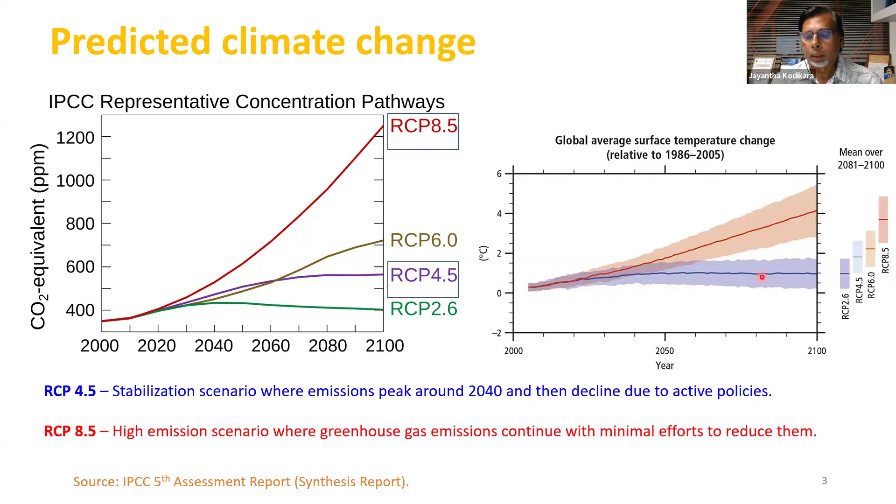So along with that, we will also get some temperature rise. This red line corresponds to the business as usual scenario. If we mitigate, we'll get a plateauing of that temperature. So I put together these two figures.

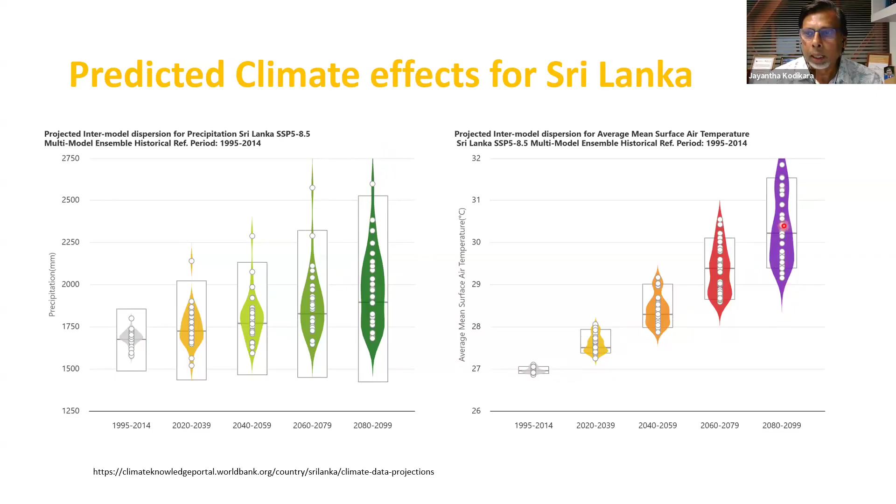If we don't do anything, you will get these extreme cases, but if you do some mitigation, you might be in the middle area. In any event, you are expecting precipitation to increase, but more problematic is this variation, extreme events, like the Ditwah cyclone. Temperature is also showing similar increase with variation and extreme events.

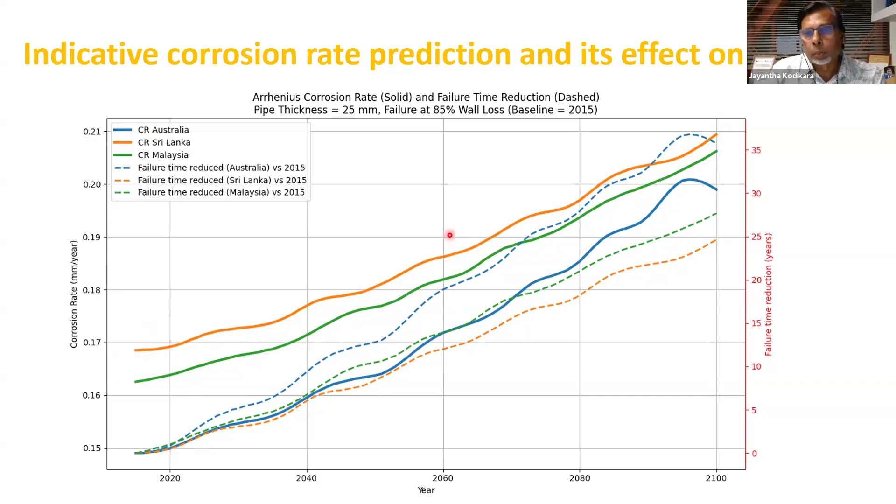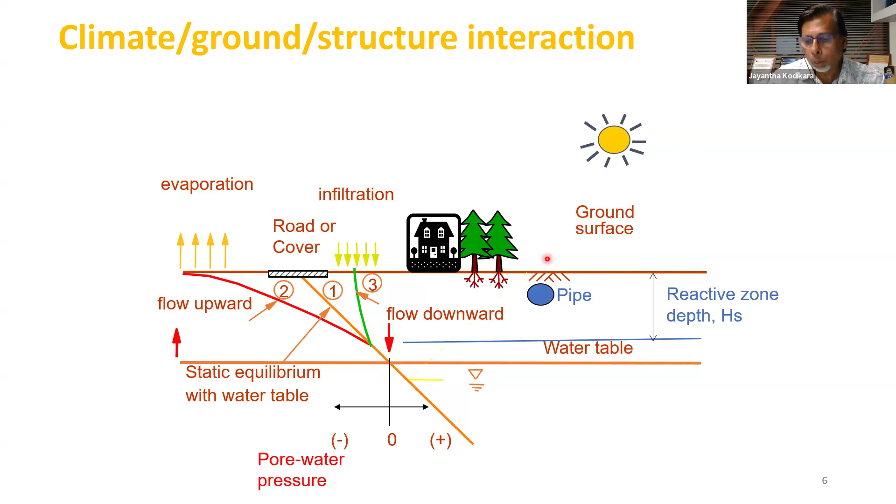So during wet-dry cycles this will fluctuate, and that fluctuation will cause anything buried in this zone above the water table to undergo effects of climate - pipes, roads, houses, foundations, and so on. That's the so-called reactive zone above the water table. Anything placed in that zone will undergo these changes. Of course, if you have a slope, then the slope will have additional problems due to gravity.

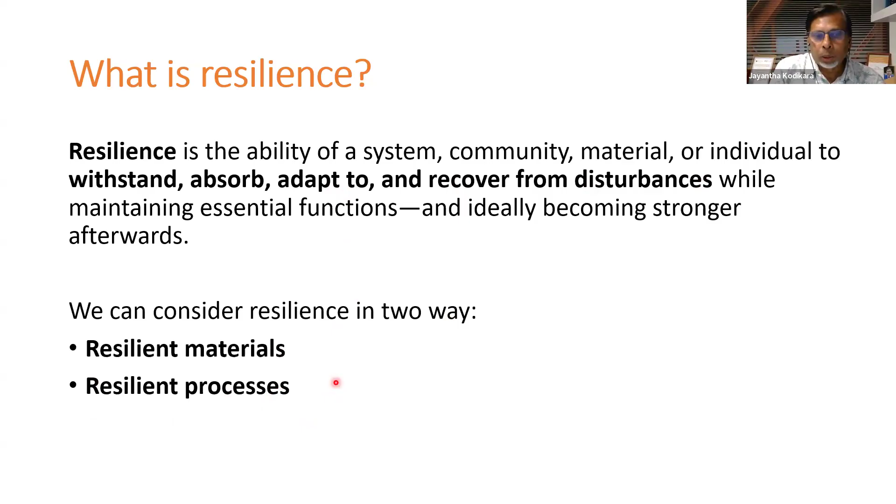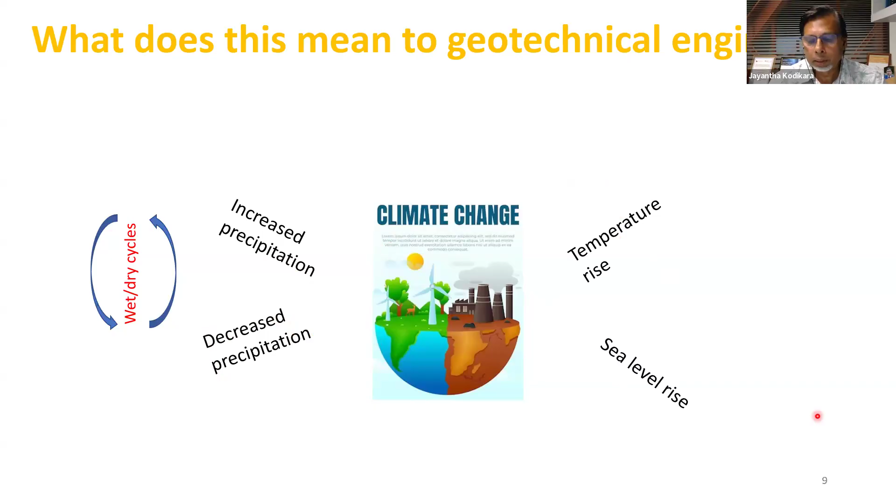So when precipitation is very high, you can get infrastructure moisture damage. You can expect landslides, which we already know, water erosion. I will talk about that. Sometimes not very much talked about, and flood damage as well.

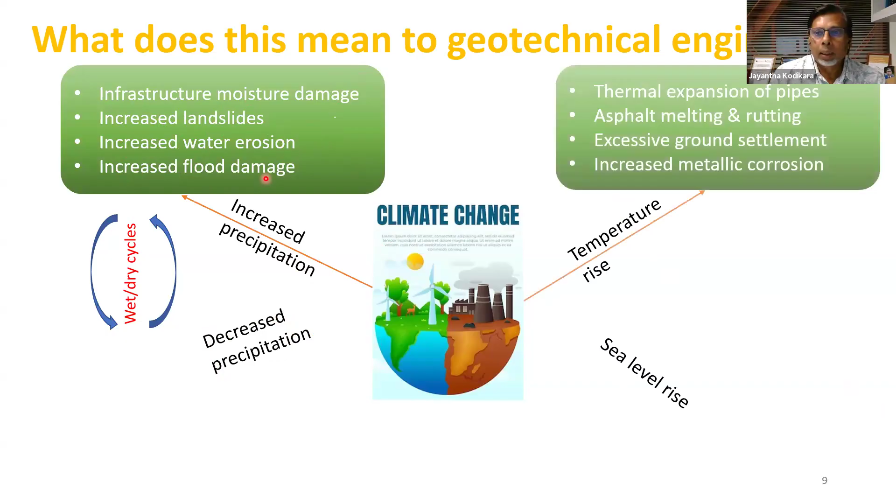So then, if you have temperature rise, you can get thermal expansion of pipes, so joints can buckle. Then, if you have asphalt on roads, then they can melt and rut. Excessive ground settlement can happen. Increased metallic corrosion. I talked about corrosion already. That's a silent problem which is not very well understood or explored.

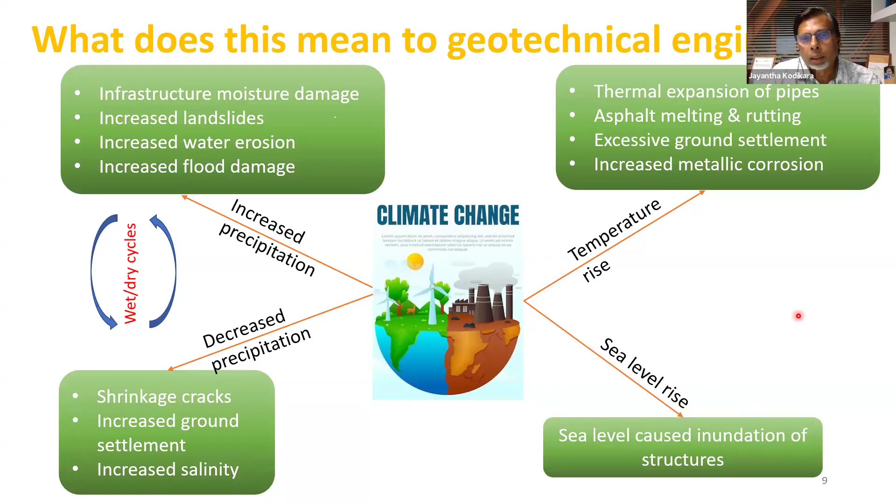Then, if you have drying, then you can get soil to crack or concrete to crack, and then increased settlement can happen. And of course, with drying of moisture, you can increase the salinity of soil as well. And with sea level rises, you can get inundation and associated problems. Salinity also may be an issue. So these are some of the climate change effects we can expect in geotechnical structures and so on.

So I'll talk about some examples on roads because we have been researching on this topic for the last 5, 6 years in my hub. And before that, of course, I was working on pipelines, but I won't talk about pipelines today. So it will be roads and mostly landslides.

So when we talk about roads, roads were there a long time ago, Roman Empire, and they had very good roads, and they maintained the empire, moving military, and also other goods and services through their network.

Then, more recently, in 1960s onwards, America developed their highway system, which was actually developed in President Eisenhower's time. It was a huge project, and they made it very redundant. That means it's bigger than they needed at the time. So that provided them with a lot of economic activity continuously without any bottlenecks. So that was how they developed, that helped them achieve economic prosperity.

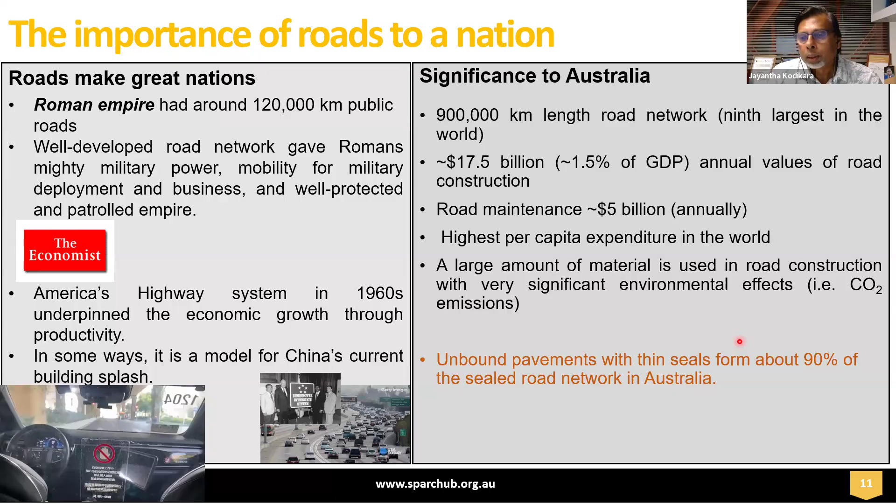Seal is bitumen or asphalt, and they are using 25, even sometimes less, spray seal, sometimes 20 millimeters, up to 50 millimeters in arterial roads. Of course, freeways and other things are high quality, thick asphalt or concrete pavements. But for low volume roads, they have been using this concept, and that's been challenged with these climate change effects.

So, what are these flexible pavements with relatively thin seals? So, they have a granular base as a load bearing base, and of course, they have the seal, which can be a bitumen or asphalt seal. I told you thickness may be not as high.

I think in Sri Lanka, in main roads, they use so-called carpet, which is about 50 millimeter asphalt binder course. And I think in very low volume roads, they may be using thinner asphalt as well, like in Australia. So, subgrade is the natural ground which has been prepared for the road, and is the weakest link normally. So, granular material is stronger or stiffer, and then the bitumen.

So, under traffic loading, they can undergo so-called plastic deformation, which leads to a so-called rut on the wheel path, as you can see here. If you put a ruler or gauge here, a straight edge, you can see how much it has rutted. Normally, we need to minimize this rut to about 20 millimeters or less, because you can get water, aquaplaning, and it is hazardous.

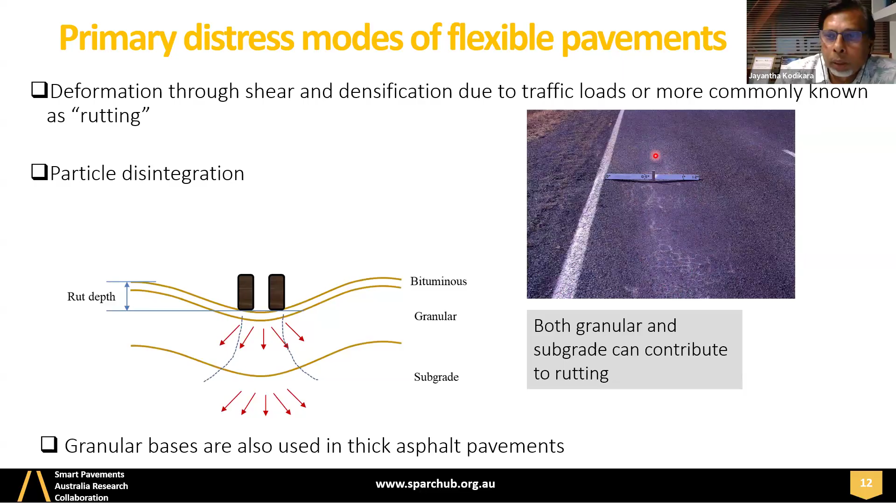So, this rutting is the primary distress mechanism for these unbound pavements. And of course, stiffness is also very important in this load-bearing unbound layer, because under wheel load, if the stiffness is low, load will directly come into the weak layer, subgrade, and you can get more rutting, because rutting can happen in subgrade as well as the unbound layer.

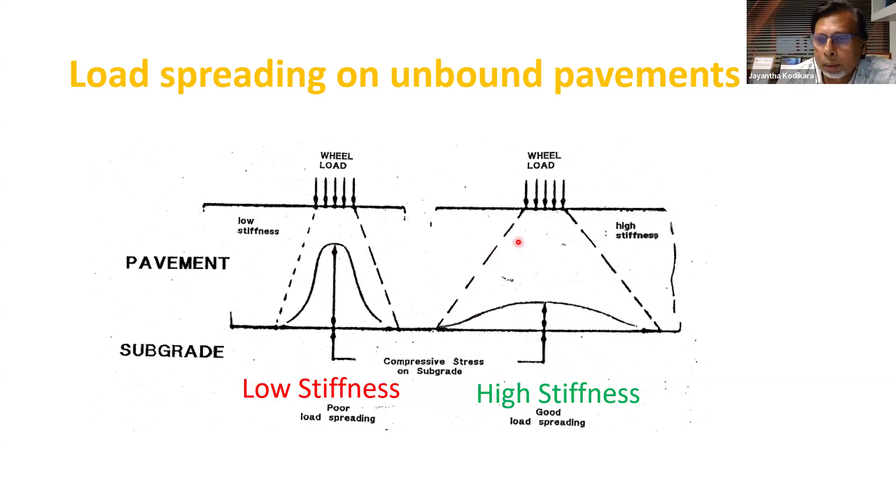But if the modulus is high, stiffness is high, then the load will be spread over a much wider area, and therefore subgrade will get a smaller stress, and therefore it will not rut as much, but still rutting can come from the unbound layer. So the stiffness has this kind of shape with water. So here water is represented not by moisture content.

I am representing it by degree of saturation, because an unbound material is crushed rock or something similar. It could be recycled material, recycled concrete, gravel taken from a nearby quarry or crushed rock. So either way, you have these spaces between aggregate, holes or voids. So you have void ratio or density.

So if the voids are completely filled with water, your degree of saturation is 1. If voids are completely empty, your degree of saturation is 0. So in between, the amount of moisture gives degree of saturation going up to 1, right? So in that context, you can see if degree of saturation is increasing, then initially modulus goes up to a certain peak and then drops down rapidly as degree of saturation approaches 1 because of the effect of moisture.

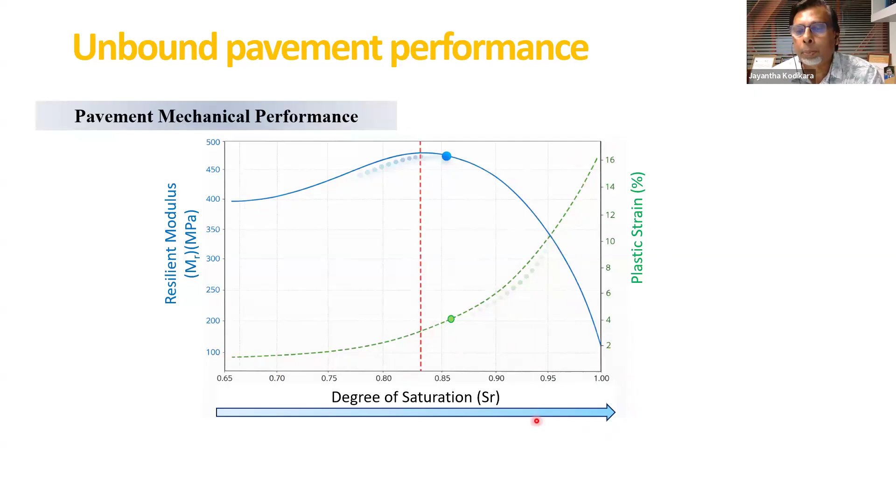This line here shows the rutting or plastic strain. So rutting continually increases with the degree of saturation and rapidly increases as it approaches degree of saturation 1. However, performance losses can occur even before saturation. See, around here, 95%, 90% saturation, you still get significant rutting. But if you go to saturation, of course, you get excessive problems, something like flooding.

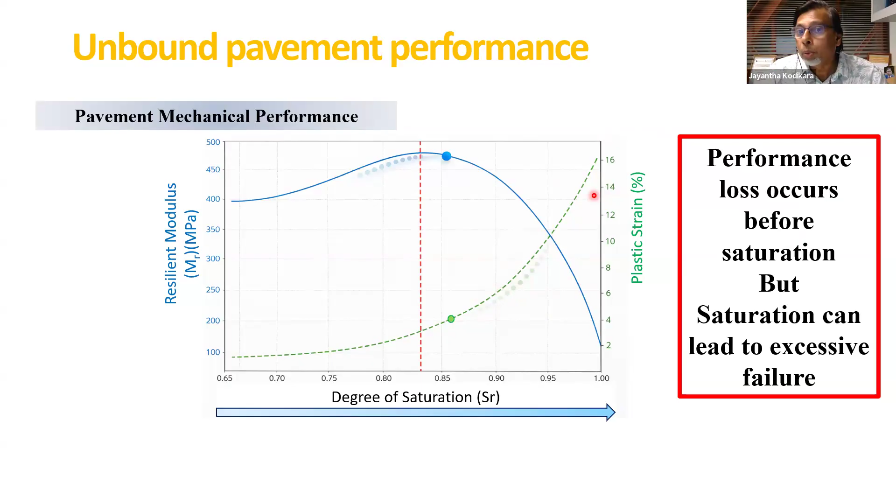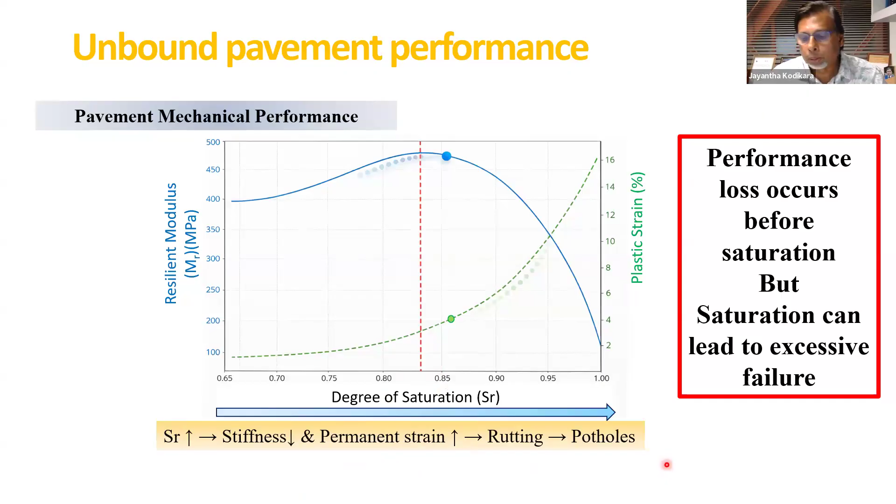Under flooding conditions, if the moisture gets into the pavement, you can experience a lot of rutting. But moisture may not get in if you have a good seal, right? Your seal performance is paramount. So I'll talk about that later also. So if degree of saturation increases, stiffness can drop, permanent strain or rutting can go up, and potholes can also happen with cracking and so on.

And Australia also has a significant number of unsealed roads. Unsealed means no seal, so it is unbound pavement only. So they can develop all sorts of problems. Corrugations can develop, water erosion can develop, and so on. Then, of course, excessive rutting.

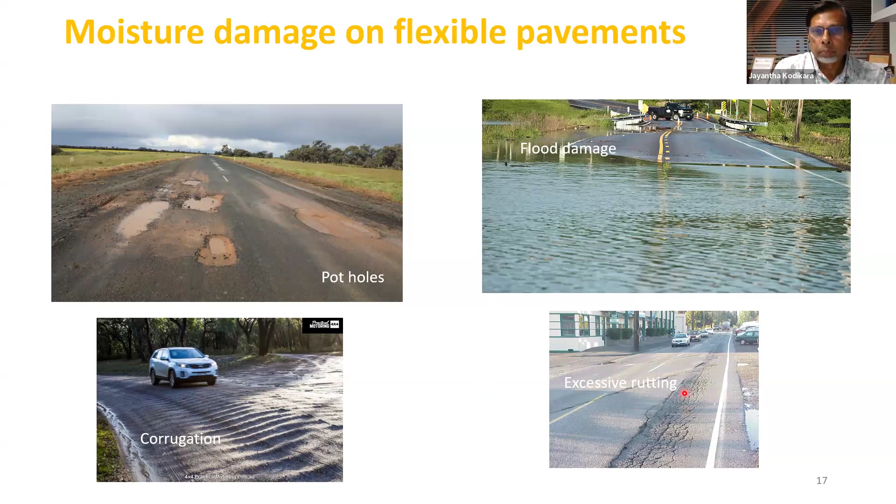So we have actually instrumented the pavement in Queensland, and we measured the moisture variation in the pavement with time over a couple of years. So here, a 50 millimeter asphalt layer, which is a good asphalt thickness, not a spray seal or anything, which I like, about 50 millimeters. So similar to, I think, your good quality roads in Sri Lanka, and then you have a layer here, base, and this is a subbase, and then the subgrade, right?

So normally base can be divided into two parts: good quality crushed rock as base, then marginal or lower quality material as subbase. So we monitored this in this road here, and these are the three graphs you can see. This is degree of saturation variation with time. So 0 to 700 days, so roughly 2 years.

So you can see the top one is subgrade. So from the starting point of the pavement construction, it was a new road, and then it saturated and stayed pretty much around 0.8 saturation throughout, right?

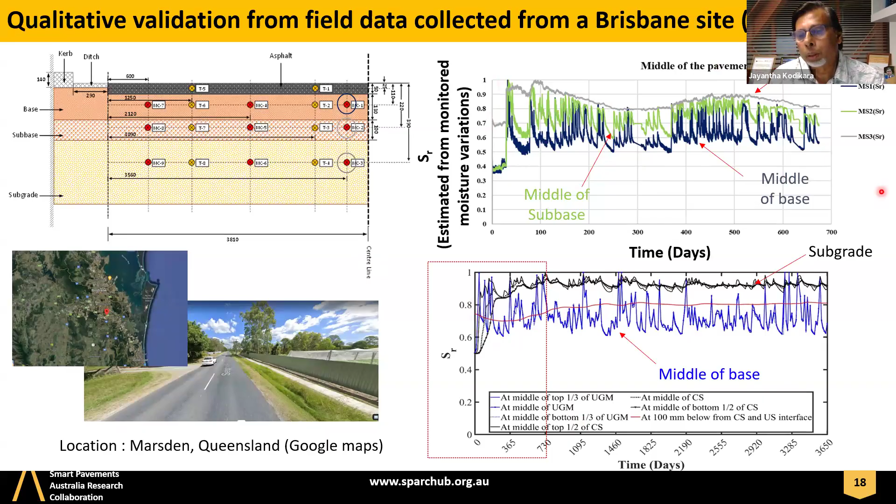So this is a model that has been run for these conditions using finite element modeling, simulating the climate, and it can qualitatively capture this, not exactly, but very close to what has been observed. So modeling capability is there to see the climate effects.

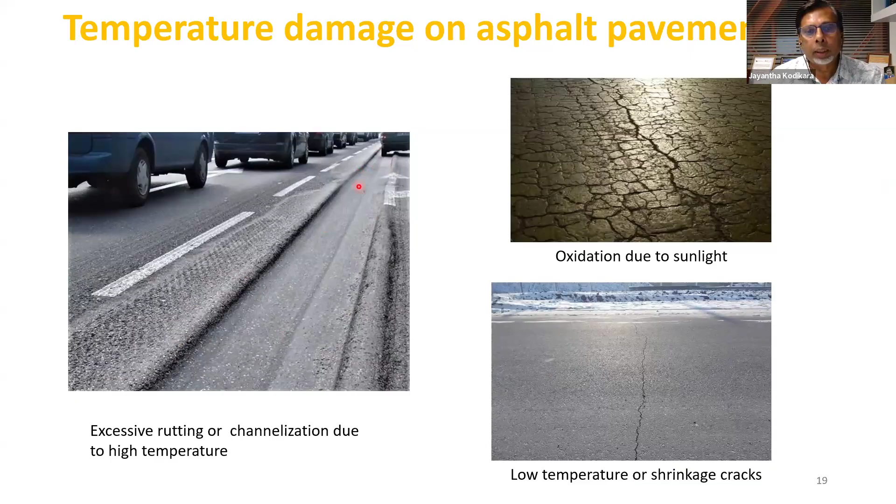So this is temperature. So temperature affects asphalt. Moisture affects soil and aggregate under base and sub-base and subgrade. They are not affected very much by temperature, but air temperature affects the asphalt, and it can undergo rutting and shoving and cracking and all sorts of problems.

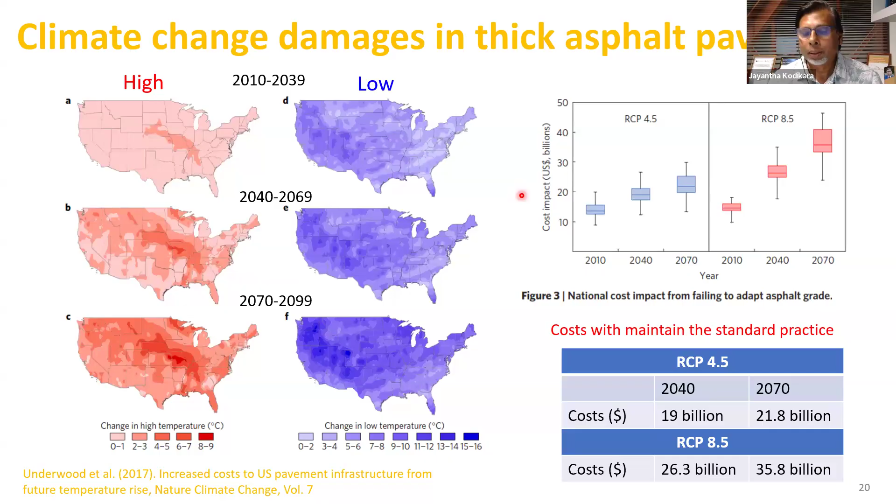So some advancement on road pavements. So based on our research in recent times, what we have advocated is to capitalize on digitalization, advances in AI and data collection, and so on, and add resilience, climate resilience, to the pavements. In order to do both, we have to integrate these processes in any design in civil engineering.

What does that mean? So, as far as roads are concerned, we have to test materials and get information: density, and the moisture content. We are talking about unbound bases or sub-bases. So degree of saturation also comes in from that, and the modulus. So those are the key things we measure.

And of course, rutting is the one which we are trying to limit, and we do the design based on these testing parameters, and we construct based on those parameters, according to design. So performance-based construction. Currently, we don't do that.

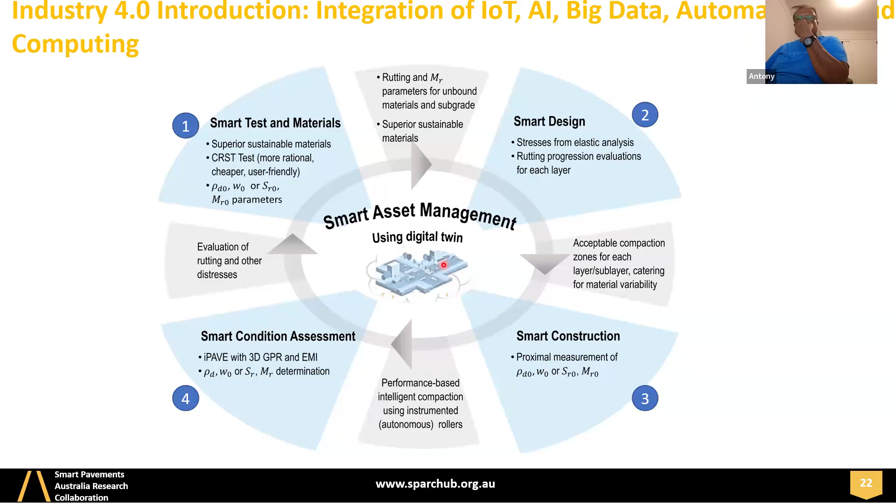If you don't integrate processes, then you cannot get the best benefit of digitalization. Processes must be integrated. Information should flow from one to the other, and then you can utilize the collected data to tell you what might be going wrong, what can be done to improve it, and so on, right? So a so-called digital twin is a concept that's proposed to house that process. So that's what we have been advocating. But if we go back to our current specification of these unbound layers, currently we are very simply doing this.

We are plotting in the compaction plane density against moisture content, the so-called compaction curve, Proctor's compaction curve, and there are multiple curves we can get for different energy levels. This is called modified Proctor, higher energy. This is the normal Proctor, and then even higher. So they may represent bigger rollers, if you like, smaller rollers, handheld, bigger rollers, and even bigger 20-ton rollers,

and things like that. So what the current specification does is it gets this maximum point, moisture content is specified, maximum density is specified within some tolerance, and then construct to these specifications. So rollers will have to go and densify to get this density, and the material is prepared at this moisture content. So this is the traditional approach, but the problem with this is this red line is the line of optimums.

You can end up on the wet side of this line of optimums. Then as you saw in that curve, remember the rutting curve went up very rapidly when you approach saturation. This is the saturation line. You can get a lot of premature failures. So that has been already observed, and because of that,

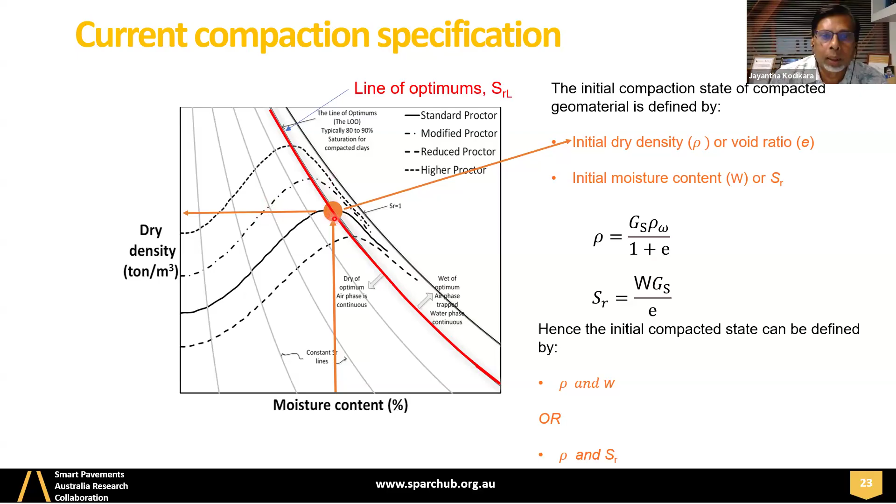pioneered by Queensland Main Roads, they have said, okay, you can construct here, but you have to dry back before you put the seal. You have to reduce the moisture up to here, and then only you can put the seal. Don't put it here, because you cannot really go to this one. Sometimes you go up and so on, then it's problematic. So that's the current practice.

So in order to test materials, we developed a new testing method. We call it the CRST test. That's fairly a mouthful, constant radial stiffness triaxial, but don't worry about that mouthful. It is CRST, right? It's a very simple device. It's a compaction mold split into pieces. You get a bunch of pieces. Then you put them into this cylindrical mold, but in order to keep the thing together, you put a band around it. This band is called a stiffness band.

So when you compact the soil, we have the stiffness, and we compact the soil in the traditional way using a hammer, and then we conduct the test by cyclically loading to simulate traffic loading. Then you can measure the amount of rutting that might develop in the pavement and also the modulus. You can measure both rutting and modulus with this test. So this test is much simpler, and it is very rational. It takes into account the pavement behavior more closely, and it is easy to do and

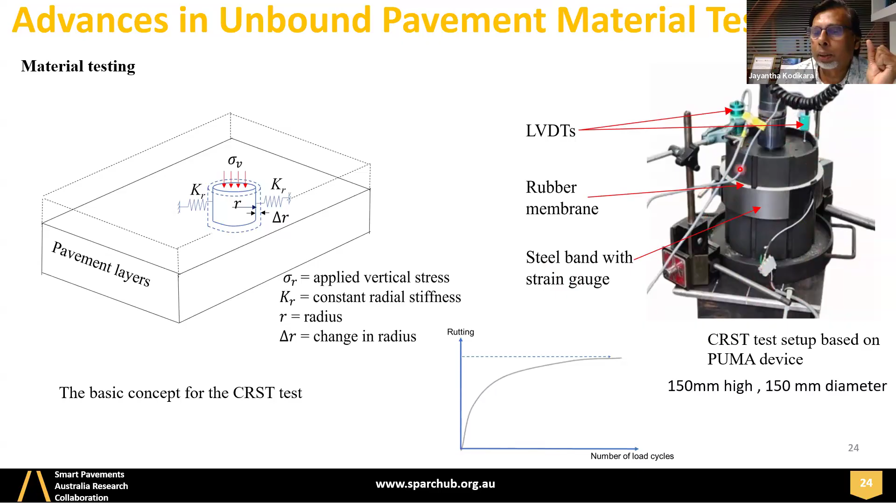cheap to procure. We call it a smarter test as well. Normally if you want a smarter, more rational, advanced test, it will always be very expensive and complicated. In this case, it's the opposite. It is simpler, it is cheaper, but you get better results. So we were proud of that achievement, and currently Austroads is investigating adapting this to Australian practice through NTRO. NTRO is doing a research project at present.

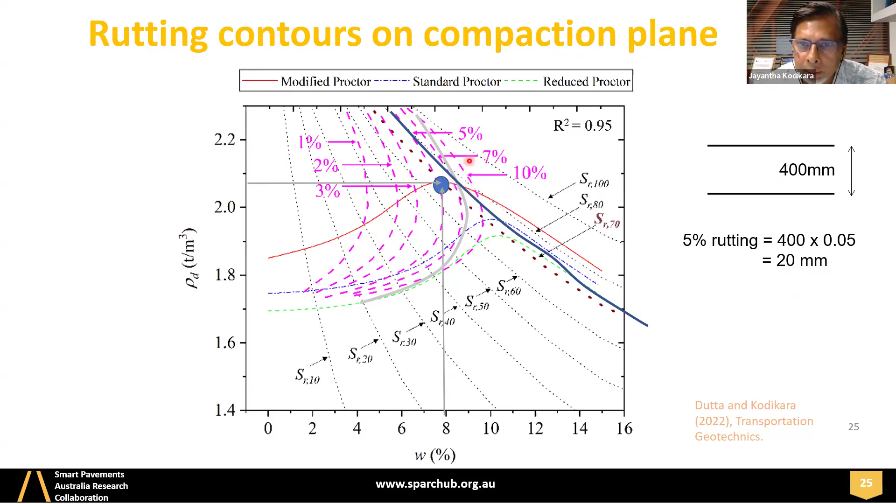But you can see if you go to this wet side, these contours get congested and you get more and more rutting rapidly. But if you dry back, like Queensland Main Roads is advocating, to this smaller moisture content, 6% instead of 8%, you are on the 2% rutting contour. That means your overall rutting at the end of design life is 8 millimeters, much better. So you get better performance by drying back.

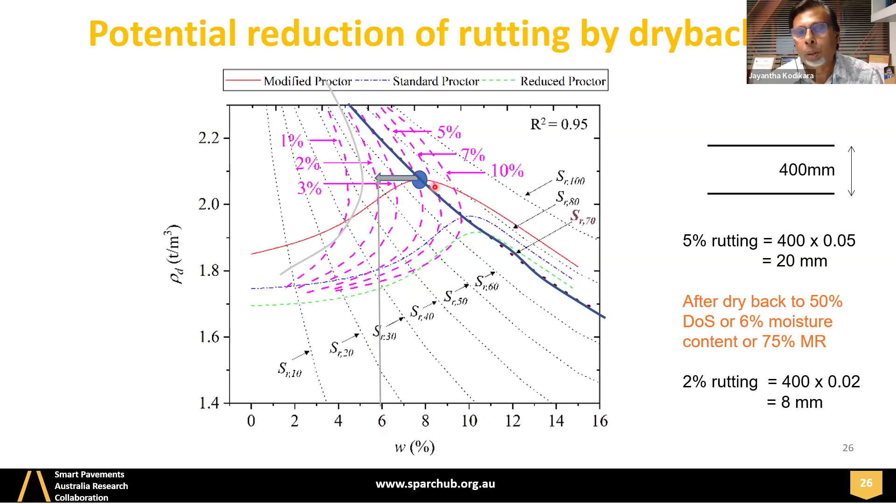So this is the first time it was demonstrated, by this test. Actually, this simpler test allowed us to do many tests and get these contours. Nobody has seen these contours before, right? So that is the advantage. So next, we developed a design method to go with the test.

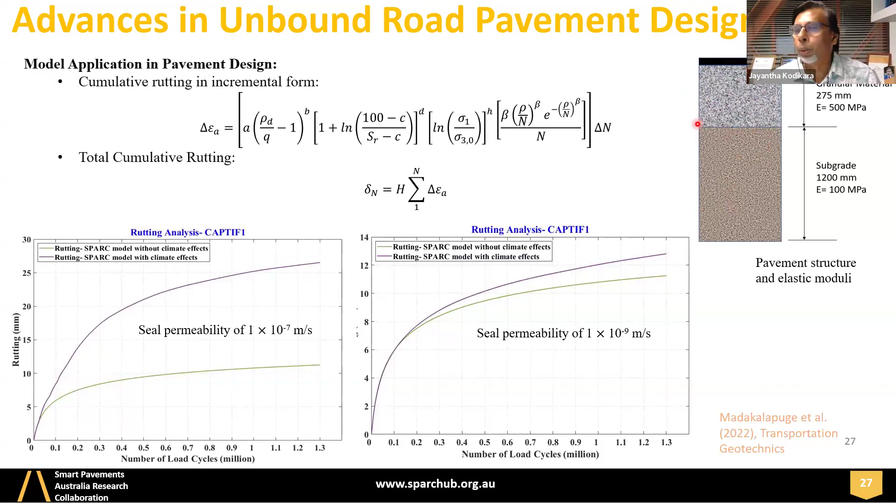Otherwise, you get a deteriorating pavement because when moisture gets in, the unbound layer ruts, the asphalt layer will bend and crack, more moisture will get in, and deterioration will continue. And potholes and other things are the result.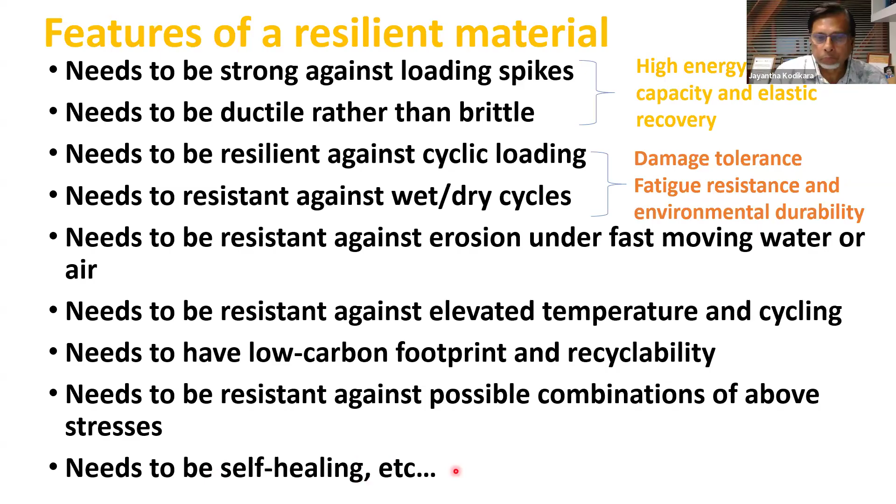So here, some examples of resilient material. Again, it's pretty much done in Queensland more, because that region is prone to flooding and heavy climate effects, cyclones as well. So this material is called foamed bitumen. Foamed bitumen is aggregate, like crushed aggregate, and you add bitumen and also cement or lime to add some strength. So cement or lime adds strength, bitumen adds flexibility and cohesion. So how does it happen?

That foam bitumen is used to build these roads, and apparently they have been very resilient. Even after flooding has gone away, the road has withstood without failures. So there are examples like that we have heard from practitioners in Queensland main roads. So that's one possible resilient material, and we have investigated how it does it, and it is something like this.

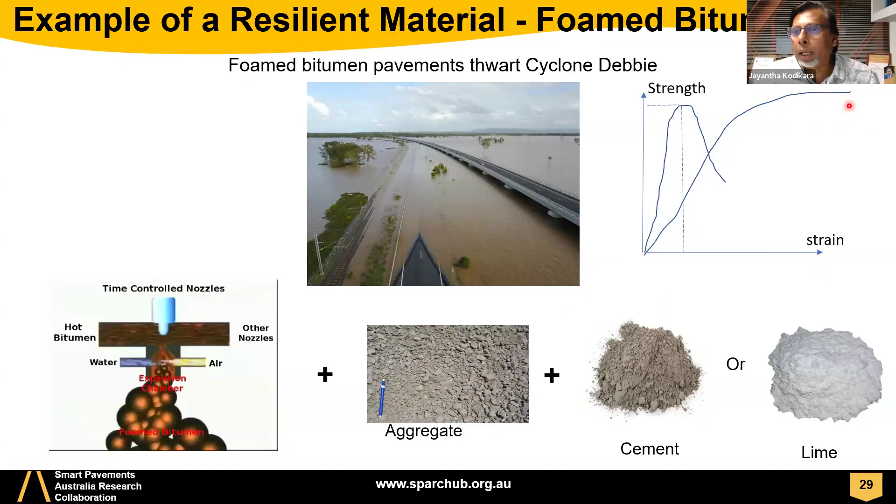But if you go to nature, your humble spider is actually doing it already. If you look at this from a Nature journal, some publication given about how spiders' webs perform under different loads.

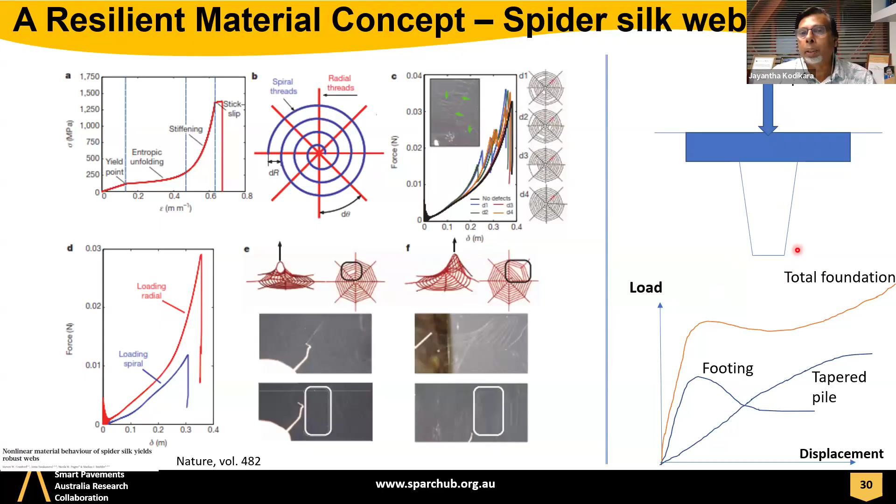Similarly, we could use this as an example in geotechnical engineering. If you have a shallow foundation, footing along with the pile together, you can get this kind of behavior. In small loading, shallow foundation will respond, but as deformation goes more, deep foundation will come into play and resist the loading. So similar concepts are now currently being proposed in wind turbines, under cyclic loading and so on, in seabed and things like that, where heavy loads can come and structures can be very large, up to 100 meters or high wind turbines.

So now I move on to landslides. This topic is, of course, something I studied in Sri Lanka in December after the Ditwah cyclone, and also in January. I had time to study some of these there while I was affiliated with NBRO, National Building Research Institute, working also closely with Professor Atula Kulatilaka. I think Atula is here somewhere, I saw his name. He was the pioneer in this area. I am, of course, still learning, so I will share my experience with you.

Cyclone Ditwah happened during 27, 28 November. I went to Sri Lanka on the 4th of December. It had heavy rainfall, 400 millimeters in one day, and severe winds, landslides, more than 1,200 landslides, mostly in Kandy, Nuwara Eliya and Badulla regions, and flooding inundated 1.1 million hectares, 20% of the land area, and so many fatalities, and 400,000 families affected.

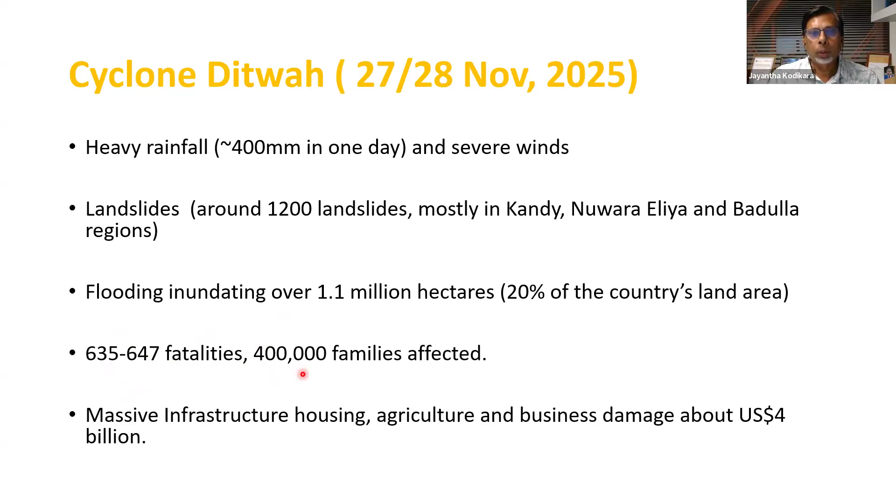Still, some of the people are being repositioned. So massive infrastructure, housing, agriculture, business damage, about $4 billion US dollars. So it's a large event, 1 in 100 or more event, and probably attributed to changing climate.

Sentinel-1 satellite uses radar, Sentinel-2 uses optical. I think this one is based on optical. They use this satellite imagery to come up with this figure. They are very advanced in that area and have done a fantastic job responding to the Ditwah cyclone aftermath. I was privileged to learn from them, and Dr. Professor Kulatilaka was also a pioneer in that organization.

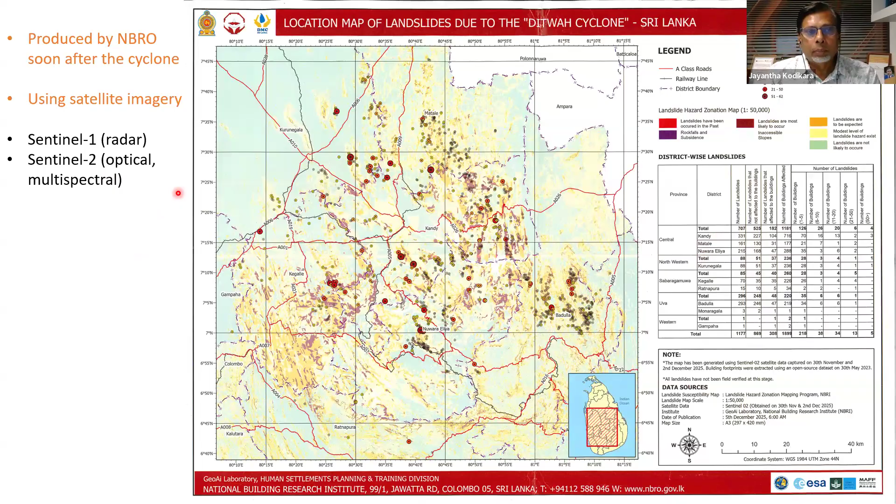So you cannot really protect easily against such a debris flow. Very devastating. The second one is slow translational or rotational, compound but deep-seated. This debris flow is more shallow, and might follow a certain channel, like water—it likes water, so it follows a certain creek or channel. Whereas deep-seated landslides might cover a large area, with telltale signs of scarp development or cracking, and you can see the exposure of the soil underneath.

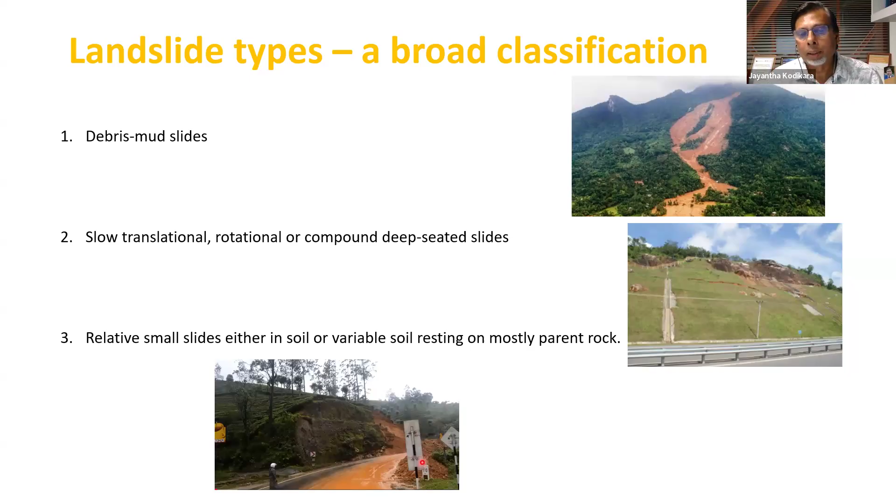There are other categories too—lots of smaller, medium to small landslides, several meters, 10, 20, 30-meter kind of landslides, mostly covering roads and other places. They are mostly a problem and headache. If somebody is at the wrong place at the wrong time they can get hurt, but otherwise it's mostly a headache—you have to remove the material and clear passage for traffic.

You can see some houses damaged, and rock may be exposed. The soil has traveled above the rock at variable depths, which is very common in Sri Lanka with the residual weathered profile.

Here are some of the interpretations. Drainage may be the main thing, because you may need to control it at the top, but that's not easy in an area like this. Even if you build retaining walls at this level, they won't be effective because these are large landslides—it will destroy the retaining wall on the way.

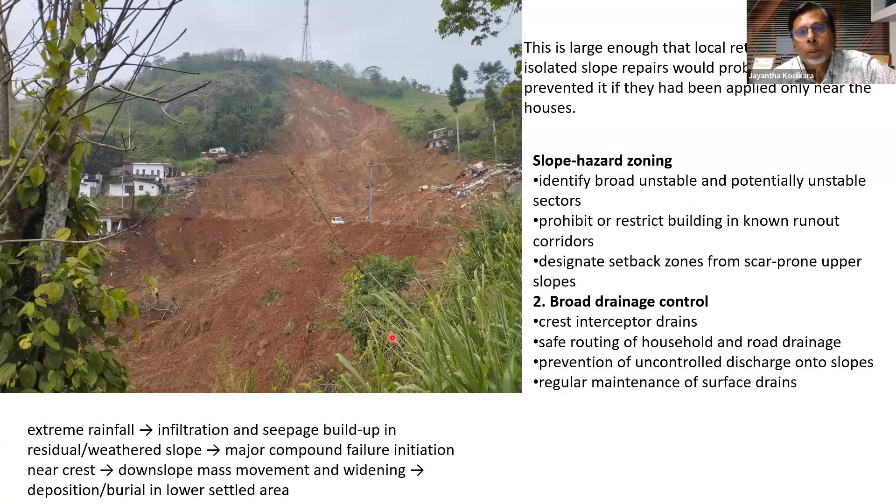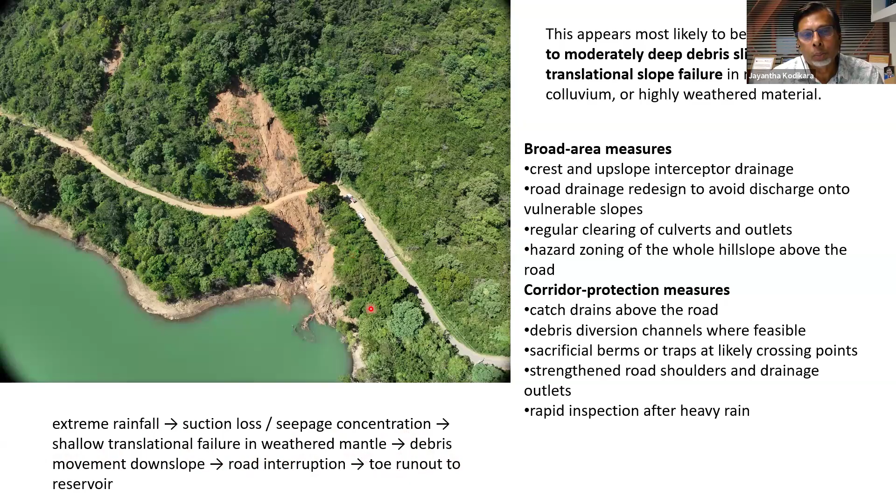So again, infiltration needs to be reduced somehow, and drainage needs to be facilitated, especially in the toe areas and so on.

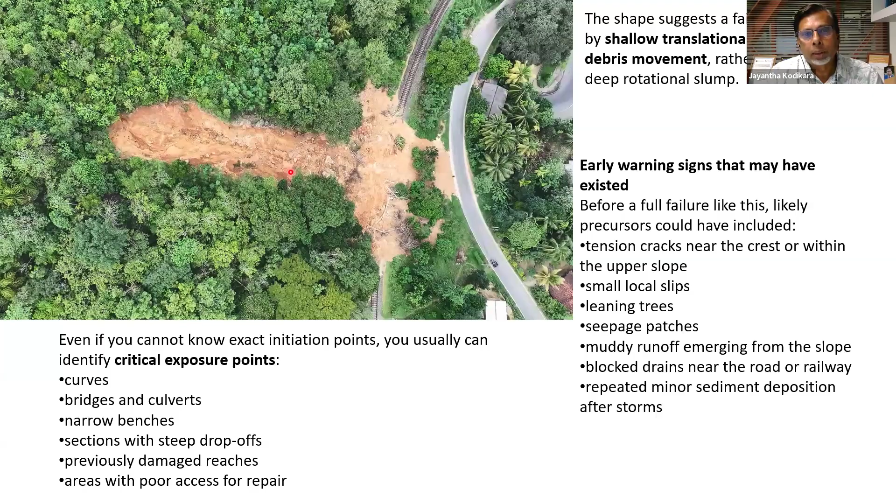Going back to this one here—this is an interesting one also. You can see this is next to the railway line. This is actually a rainfall induced shallow compound slide. You can see these erosion gullies—lots of erosion has happened, meaning a lot of water has come to this side, presumably from the other side, coming under the ballast, because ballast is very permeable, then emanating from this side and creating water pressure. Because the crest area has a lot of water pressure, that created the slide, and erosion also accelerated it.

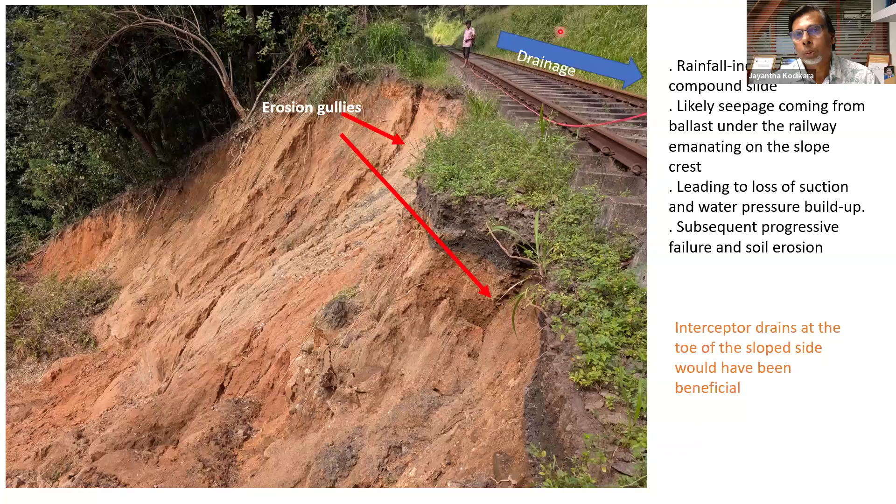Interceptor drains—if you create interceptor drains on the slope side and maintain them, that may have helped this issue. So that's one thing one could see. Drainage is a paramount thing in preventing landslides.

This is an example I have taken from a thesis done very recently, in 2025, supervised by Professor Kulatilaka, with Milinda Amarasinghe as the author.

In this picture you can see these are the drains at the crest level, top level, removing water coming into the slope. Having surface vegetation helps reduce erosion primarily. However, it may allow water to infiltrate. Vegetation roots can provide some binding effect to a certain depth, but not deeper. It can reduce erosion, but when water moves slowly, that can provide more infiltration. So it has beneficial and non-beneficial effects. If it's a big tree, it can also add weight, even under cyclones.

You can have these kinds of drains catching underground water, and in a three-dimensional sense it becomes a network, with drains at the front as well. So drainage is a primary mode of protection at various levels—surface drains to start with, then subsurface drains, and of course vegetation or other protection like geosynthetics and other things.

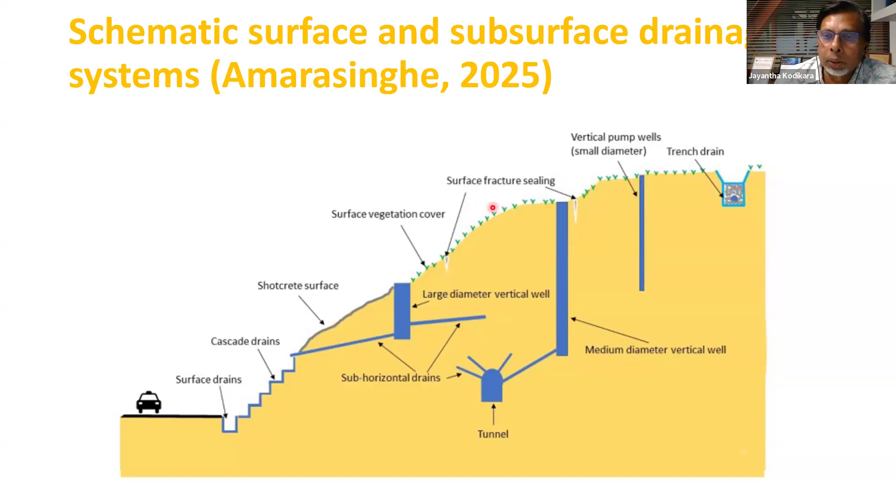So it has toe support, surface geometry improvement, good surface and subsurface drainage, and weep holes—very important. If you don't provide weep holes, water has no chance to get out and drain from these retaining walls. If you close them, you're asking for trouble.

With this drainage, maintenance is paramount—how to maintain and clean these drains. They can get clogged, and then the drains don't work.

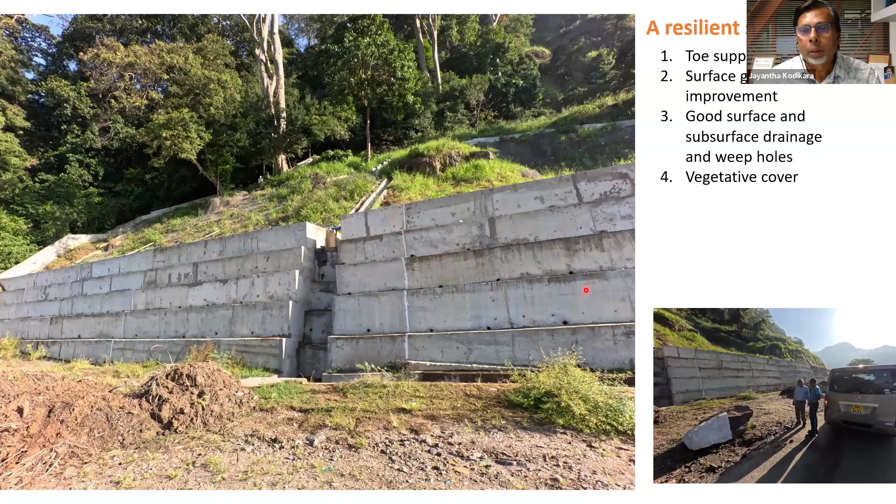Problems can arise, so we also found so-called erosion problems. Erosion is sometimes forgotten—in Peradeniya University and Peradeniya gardens, I went around them and found a huge amount of erosion. The river went very high and eroded surrounding areas. This is an erosion problem, not a slope failure as much. This is the railroad—it eroded when moisture came from the other side, eroding the ballast and surrounding area. The realistic scenario may be heavy rainfall infiltrating the ballast and shoulders from the side slope.

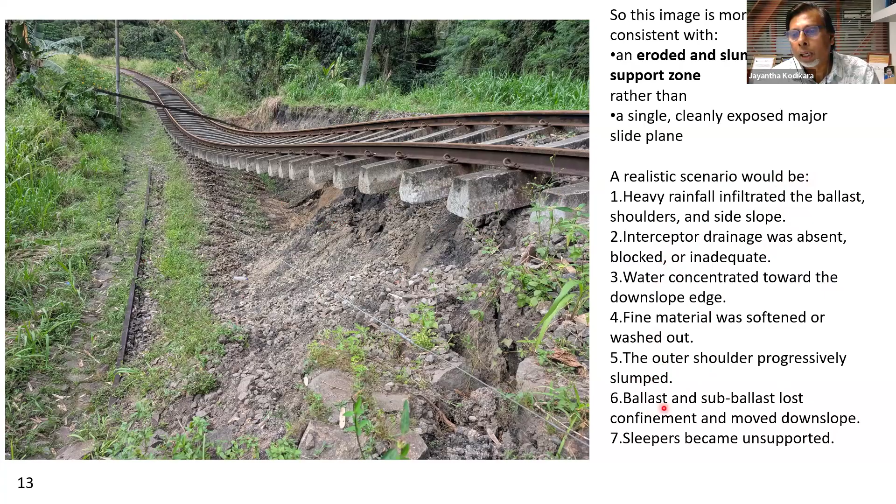Interceptor drainage was not provided, and water concentrated on a downslope. Fine material was softened and washed out, the outer shoulder progressively slumped, ballast and subballast lost confinement, and so on. So these are more erosion problems. This is another erosion problem, and it can translate to some kind of slope failure as well, but primarily it is erosion. These sandy residual soils in these regions, silty sand, sandy silt, loam kind of soil, are pretty much erosion susceptible.

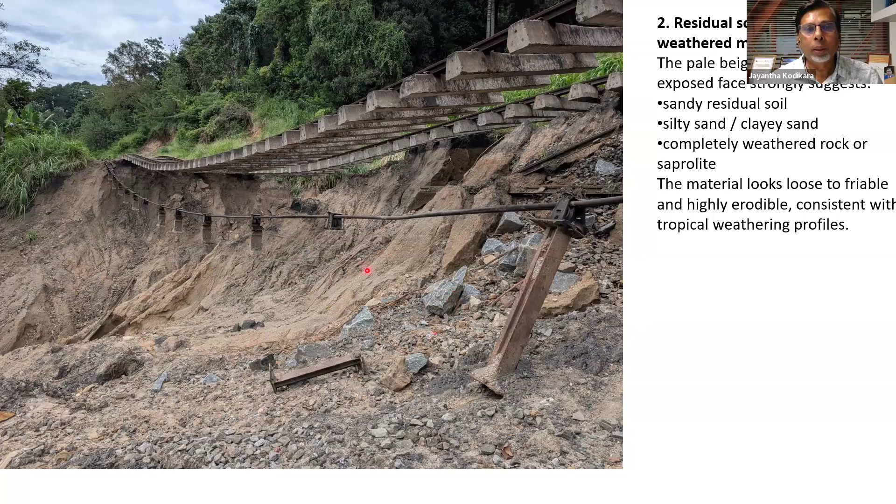So I also looked at this Moragahakanda bridge failure. This bridge in Moragahakanda failed, and that is the eventual picture of failure. So this part has gone. But actually, when you look at it closely, it is not the bridge that has failed. The bridge is this part. It hasn't failed at all. The only thing is a huge amount of the supporting approach abutment area has been eroded.

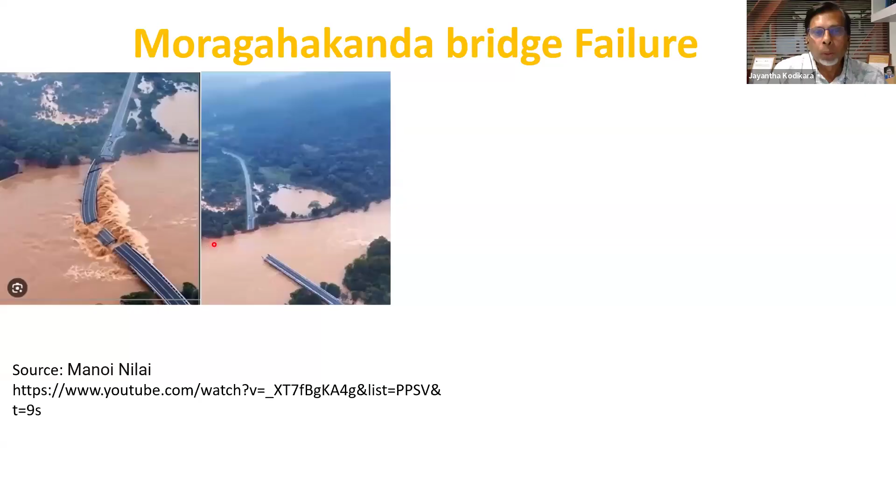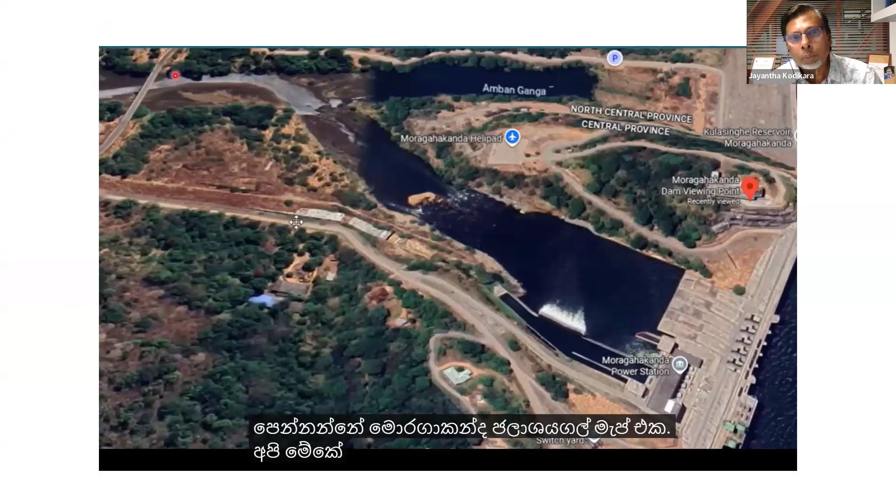So if you go here, you can see this is the Moragahakanda Dam, and that has been overflowing. All the sluice gates were open, and a huge amount of water was released. Normally, water goes in this path. Water goes like this, turns around and then goes under the bridge. So that's the bridge, right? But when a huge amount of water came, the water went straight through without bending and eroded this whole area. And you can see this area has eroded. That's the area seen here, but the bridge part is still there. So erosion happened because the water decided to go straight through.

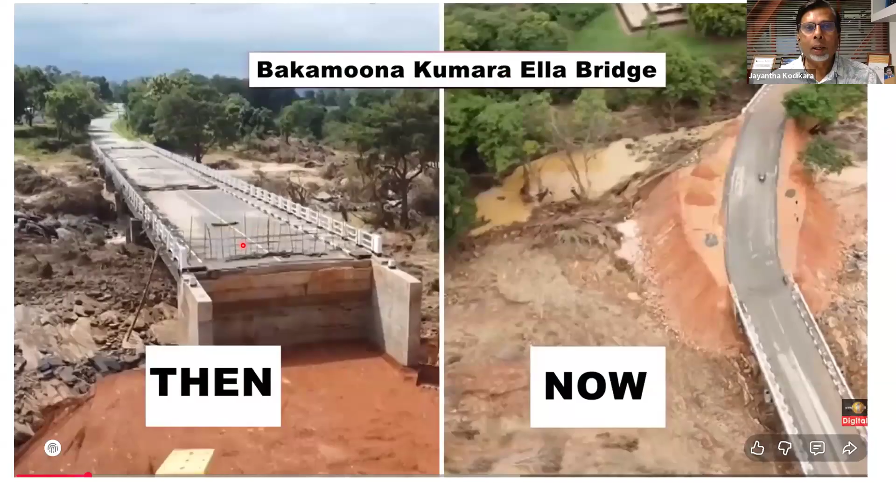I saw these pictures from YouTube and other places. So this is the bridge part. It hasn't failed, it's still there. The approach eroded, and now this approach has been rehabilitated. They filled it up and put the road back on, right? So that's where the erosion happened, this part. The bridge is okay. So you can see the problem is associated with something else, erosion. If this was not constructed properly, it will settle with rain and undergo multiple failures. So of course they need to address this. It's good to get this done quickly, but it may suffer unless it's protected properly.

So erodibility of soils is important, right? Landslides are one aspect, but erodibility of soils is very important. Silty loams, silty sands, sandy silts and so on are highly erodible. This is the so-called erodibility factor. But erodibility is not only the erodibility factor of the soil; it also depends on rainfall, how much rainfall you get, its intensity, the slope, vegetation, and any supporting structures like drains. They all determine the soil loss. So one has to pay attention to those things.

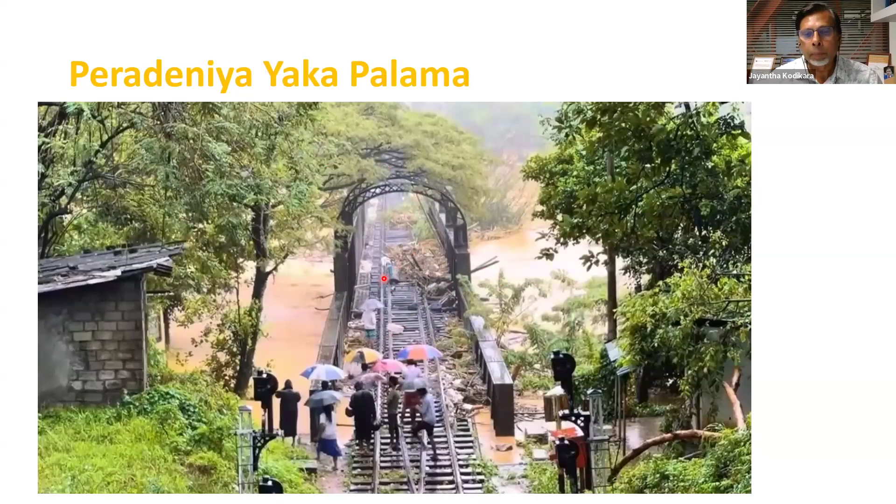I also had a look at the so-called Yakapalama at Peradeniya University, or Devil's Bridge, or Kalupalama. Water has gone over it, and it has undergone severe distress and bent, right? I took this picture because I actually walked on this bridge that day. At that time, the navy was cleaning this area. And you can see the middle pillar has tilted. The other two pillars are okay. Along with that, the whole railroad has bent, right?

Significantly bent. But when you look at it, what has actually happened is a huge amount of debris, mainly bamboo, has come with the erosion. A whole bunch of bamboo came and got trapped in front of this pillar, and that created a large force from the water on the pillar. So the pillar shifted, erosion happened underneath, and therefore it shifted. Luckily it didn't collapse. Now they are rectifying that. You can see people removing this, but eventually they had to get special equipment to remove it.

In the 1940s, there was a similar flood in Peradeniya, and that time also water went above the bridge, but a different, smaller bridge. That bridge went away, but the three pillars were standing without any problem. So water alone cannot actually damage these pillars. Water can go around them. But you get this huge amount of debris that comes and gets trapped and creates force over a wider area, and that force can become massive. So that's a resilience issue to contend with, debris flow in rivers that can plug things, drainage outlets, and so on.

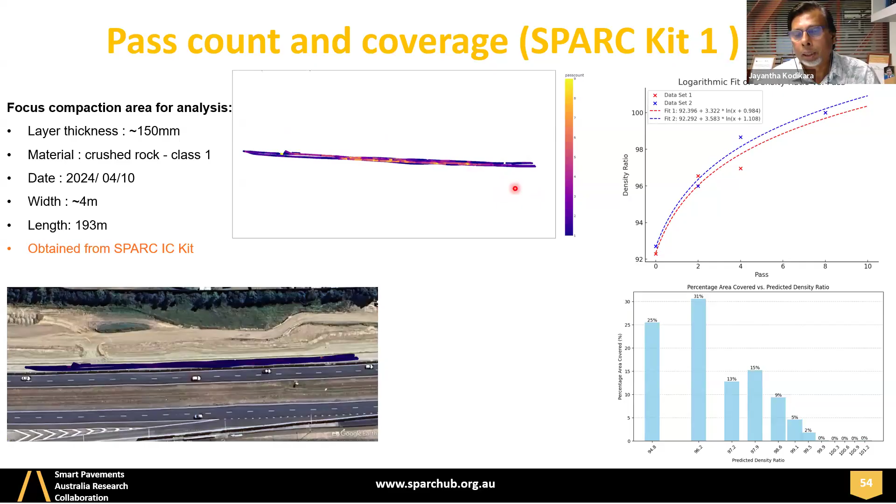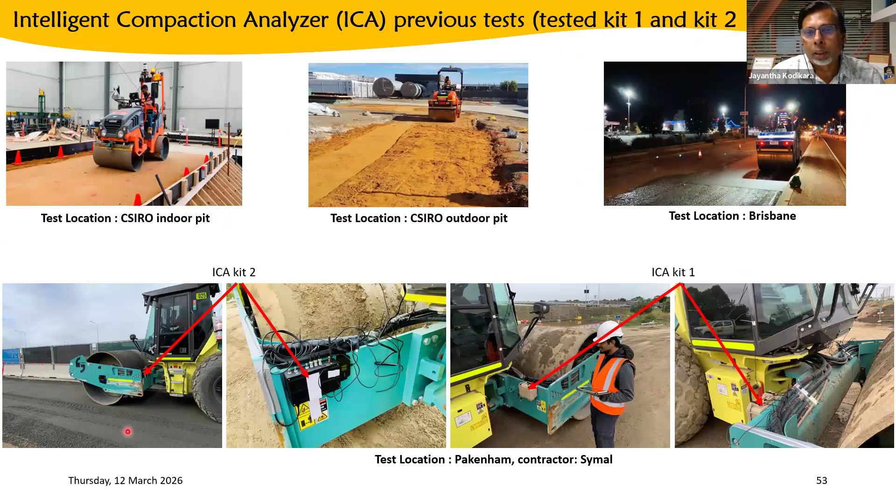And the engineer in the office will get on his mobile phone or his computer what's going on. So this is something we developed ourselves from scratch with an electronics engineer, and we are now almost ready to produce it.

So remote imagery, remote sensing is very important in digitalization. So I told you satellites, aircraft, and drones. So they can actually get a lot of information. So in geotechnical engineering, I think people are not using it as much, although in NBRO there is a division on spatial technologies and surveying, and they have experts in using these satellites and drones and so on.

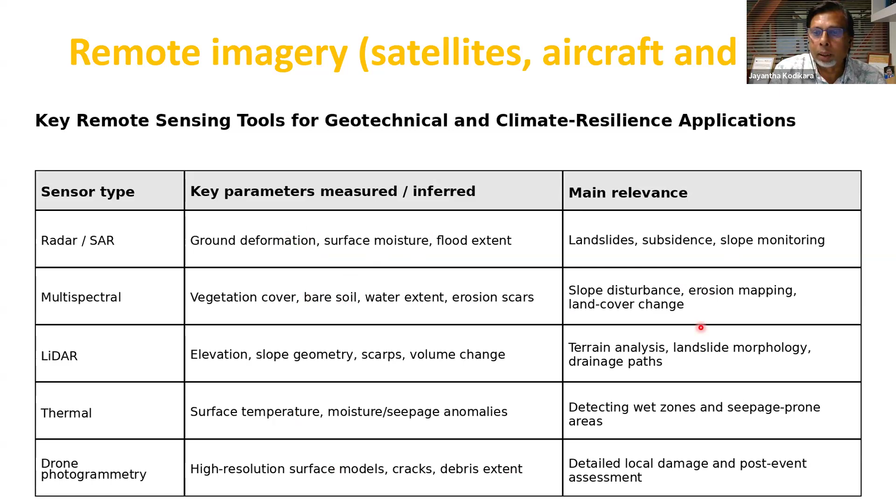And you can get information on the ground deformation, even up to cracking in buildings and deformation due to subsidence. Those things they have covered, and I think that's an area which can be very useful, and it's an emerging area in our field, although it has been used in other areas before.

So, in concluding remarks, I am proposing some change in practice, introducing a new concept of resilient modeling or resilient assessment. So you can design your things under current loading conditions, current specifications, current design guides. However, do a test for an expected extreme event, such as Ditwah, right?

And see what happens. Of course, we cannot design it for a 1 in 100 year event. We can only design for 1 in 10 or whatever event. Otherwise, our structure will be very expensive. We cannot afford that. But you can do a test with an extreme event. How much damage will happen? Like Moragahakanda Dam, if all the sluice gates are opened, water can erode this area.

So we need to provide riprap and strengthen that face of the river, so that water cannot erode, or use some non-erodible material, right? Less erodible. So those are some additional supplementary works you can do after resilient modeling.

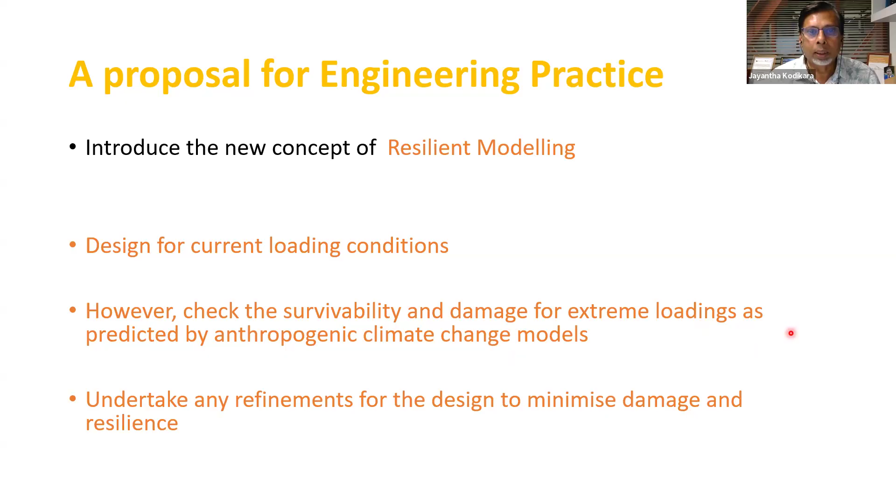We see some vulnerabilities, and if we spend a bit more money to rectify them or retrofit them, then you can have a resilient structure, because some damage will happen, but it can be reused quickly. It won't destroy the whole thing. So that is something I'm proposing based on this practice, an additional concept to be considered in civil engineering practice. So with that, I am concluding my presentation.

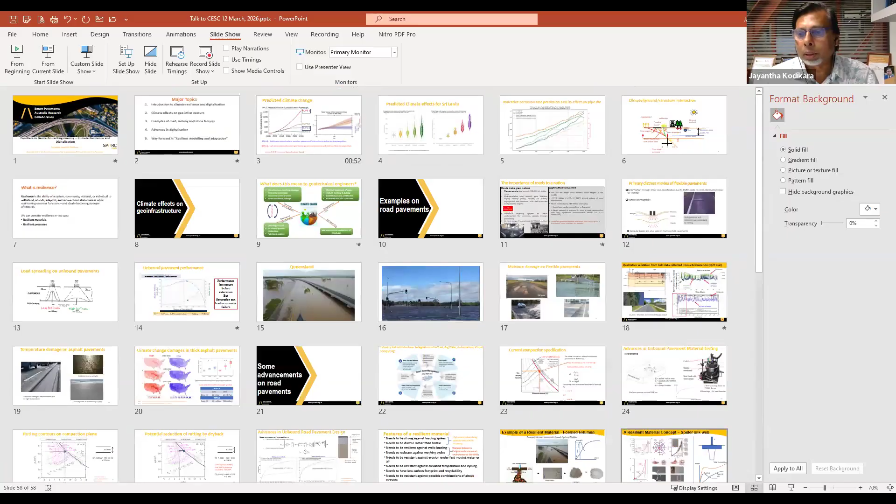Yeah, I just wanted to comment on something for the landslides, because I am looking after landslides in the TMR, in the metro region. And recently we did a sort of monitoring system. We used the survey instrument with 45 sensors.

We install it at the slope, and it will give us the movement. It's connected to our computer, and it comes to our computer every 2 weeks. Then the surveyors process it and send it to us. We just check how much movement there is each fortnight. And for Sri Lanka, can't we do this type of monitoring system where we have vulnerable slopes?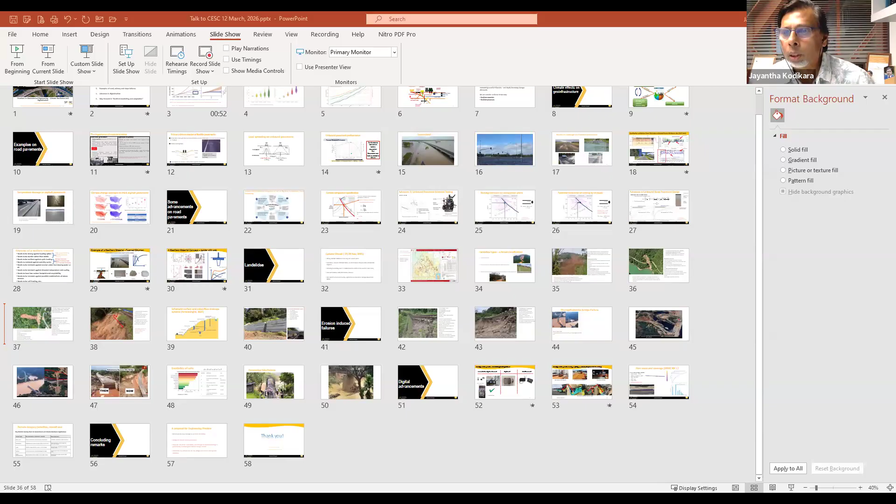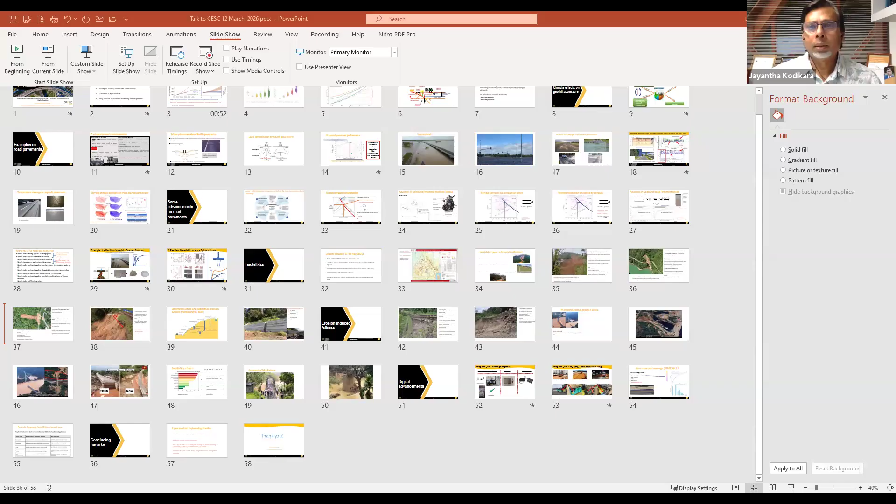Madam, excuse me. Good evening. There is a question in the chat box. Am I audible? What is this question? I can't see. Only the crack, this asphalt pavement cracking due to expansive soil. I think we answered that, right? Okay, sir. Thank you very much. We answered that. Okay, done.